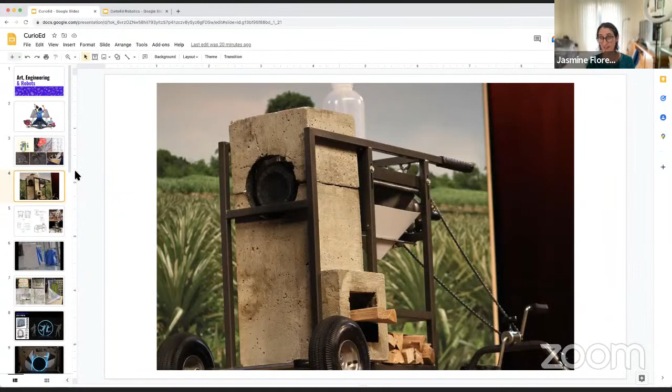And so I fell in love with product design. The reason I fell in love with it is it was sort of this combination of my love of making stuff, of solving problems, of thinking about how we're going to make this thing that can dry up milk just by using our creativity, using some math, some science. A lot of it is just about building things and trying things and seeing what works and seeing what doesn't. To get all the way to this final version, we went through a lot of other versions. That's just a couple of pictures of some of the other ones.

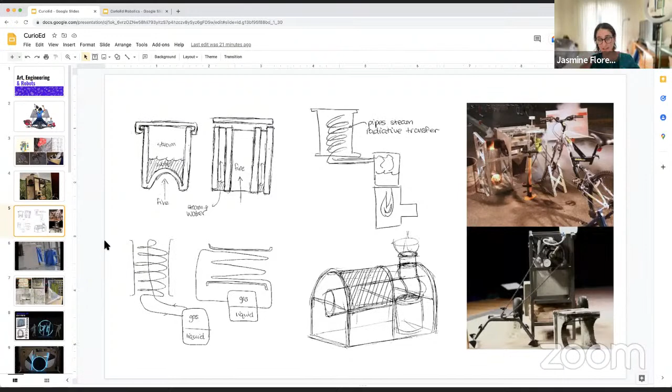So I mentioned I also like to combine art with things. And so as I kept taking more product design classes in school, I found ways to combine the art as well.

So this is another one where, again, now you really see the art and the engineering come together. This was basically for a science fiction project where we just had to make something that was science fiction themed, and my team wanted to make a really cool door. So we illustrated ideas ahead of time. In some ways it looks like an art project - it's got all these cool lights, this really cool visual - but if I show you the back, that's all engineering there.

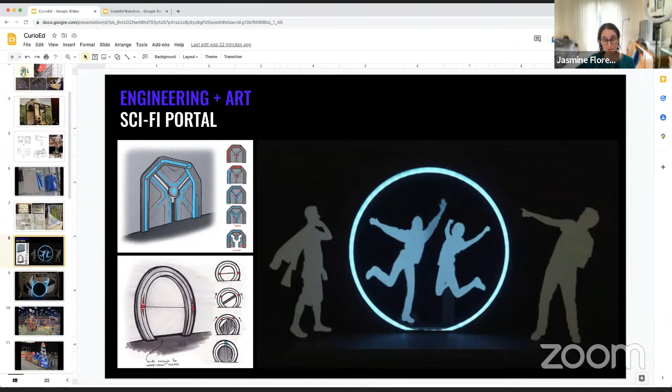We had to think about how is it actually going to move, we had to think about the electronics. It uses air power actually to move.

So after I graduated, I really wanted to keep doing things that combined art and engineering and product design. And so I worked at a place called First Robotics, and they're a nonprofit that runs robotics competitions to get kids interested in engineering and science. I think they actually have a bunch of teams in India if you guys are interested in looking into it.

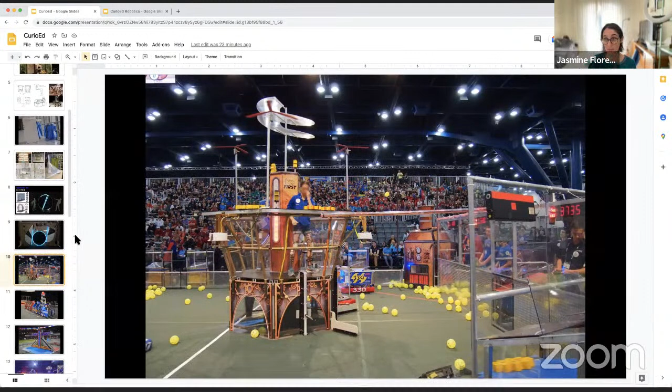So I was working at the high school level. The students actually build the robots. My job as an engineer and an artist there was to help design the games that the robots are playing.

We have these really big fields, and as an engineer, I had to think about how this is going to be strong enough that when a robot runs into it, it's not going to break. How is it going to automatically score all these little balls that come through? We need a way to automatically score them. And that's starting to actually get into robotics at that point, because when a machine is doing things automatically, that's robotics.

In addition, First Robotics wanted all the games to have a theme so they're more fun and tell a story. I got really lucky and got to do the art for all of them, which was super lucky because a lot of times if you get an engineering job, you're mostly just doing engineering. In my case, I got to think about how we're going to build this, how it's going to move, all the science and engineering, but I also got to think about how it's going to look.

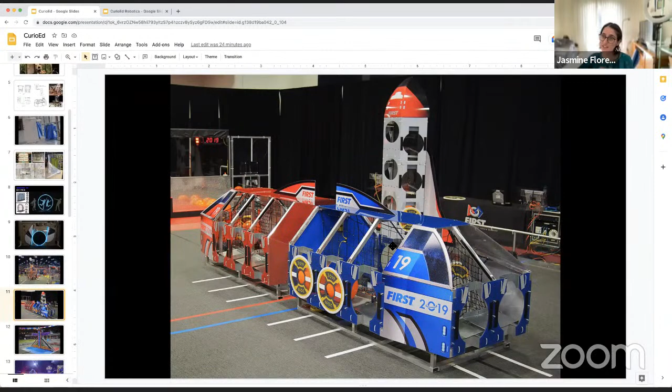So these were the games that I worked on. This one's Star Wars themed for anyone excited about Star Wars. I did not build R2-D2, unfortunately.

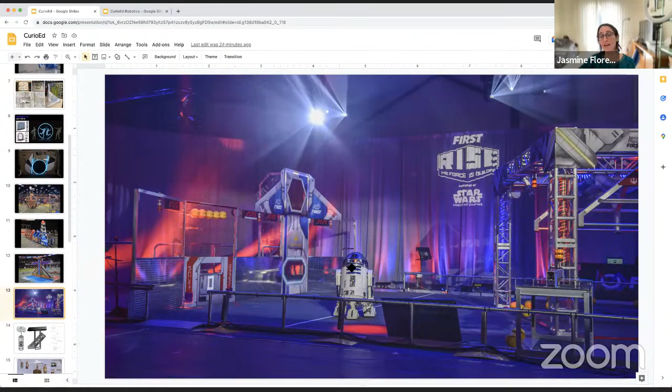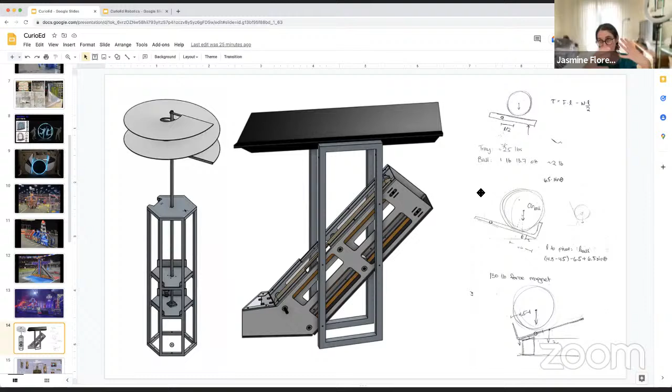The engineering side was a lot of thinking about how is this going to work, where are the motors going to go, where are the sensors going to go. A lot of it is designed on the computer, and then you go and build it on the machines. There's a lot of math just thinking about the physics of it - if you have a ball that weighs this much, what does the geometry need to be like, what material do I need to make it out of?

At the same time, there's also a lot of art. So, okay, now we can make it work, but how do we actually make it look like what we want it to represent?

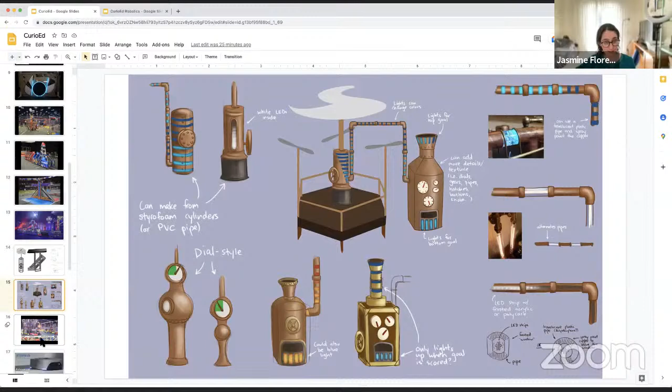So this is actually a video from one of the FIRST Robotics games. I won't play through the whole thing, just the beginning, just to give you a sense of what it actually looks like in action.

Oh no, it's just starting their trade now. Five more as the Blue Alliance unloads once again on the high efficiency boiler.

Blue Alliance - so these robots are actually all built by high school students. They work together as teams, and in six weeks they build these robots that can do all these things like shoot balls, move around, and pick up objects. They're really cool robots, in my opinion.

So like I said, I always love combining engineering and art, but I started moving more and more into robotics, and started moving more into engineering education as well.

I moved around a lot because this was when I was in the US, and then we moved to Ireland. When I was in Ireland, I worked for a more traditional robotics company. So this one you can see is not quite as artistic, but it's very functional.

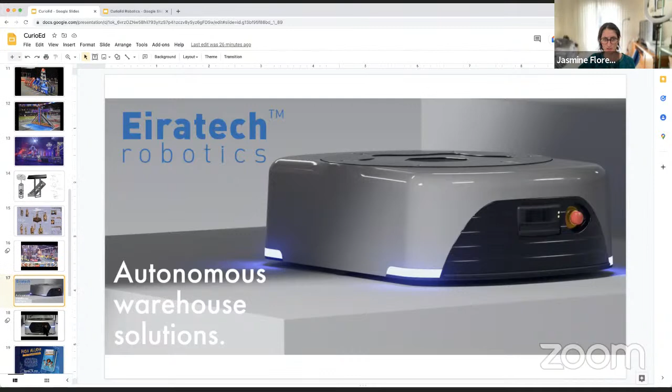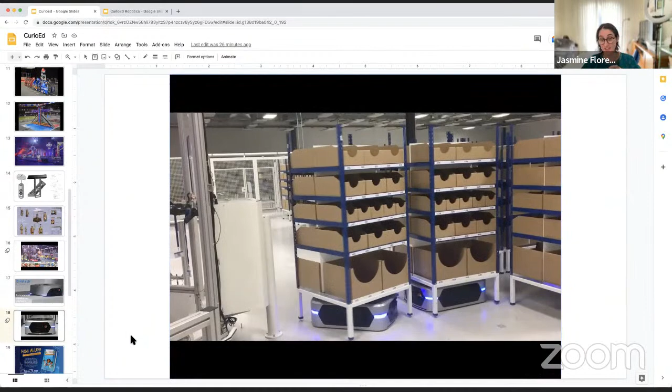So this one is designed to - let's see if that's loading. And I should add also, all of these projects I'm doing, they're all done in a team. It's really hard for one engineer to design all of these things, so we work together as teams.

These ones pick up these storage racks in factories and move them around. That way the worker doesn't have to walk down the hallway every single time and find something - the robot just brings it to them. So that was all really fun.

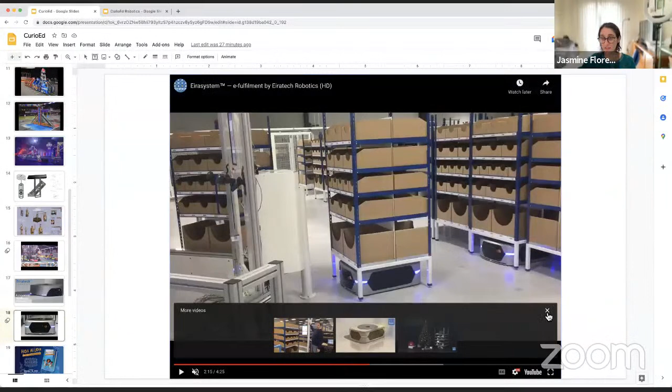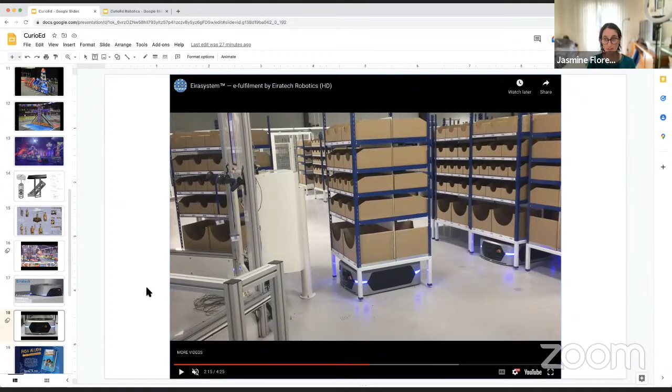And so that's what I did in Ireland. And then we moved again. At that point, I realized that I didn't want to work for a company again, just because I kept moving, so it would be easier if I started working for myself. And that gave me the chance to come back to what I really love, which is combining art and engineering and education. There's a couple things I was working on as side projects.

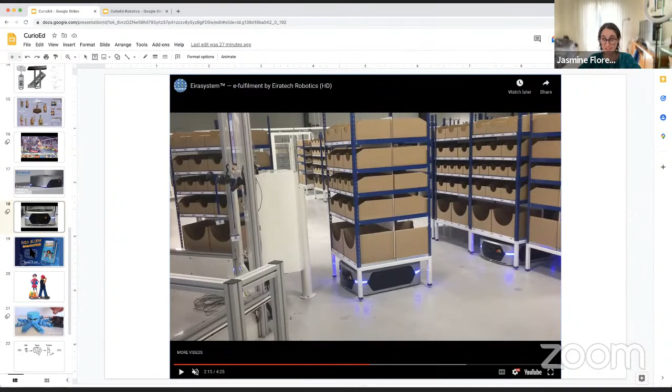So I mentioned combining art and engineering.

So I wrote a book that combines engineering with storytelling as well. And now I'm working on a comic book that also combines engineering and art and storytelling. And all of this is sort of how I got into paper robots as well.

When lockdown happened, I didn't have access, like all these other robots you saw, they were made out of metal, made out of plastic. Even the stuff that wasn't robotics requires machinery to make. But in lockdown, I didn't have any of that. I had a little bit of electronics at home, very small things, and I had a lot of paper. So I said, okay, what can I do that combines robotics with the materials I have?

I also turned my artist brain on and started getting interested in how you can use paper robots, especially because I really care about education. That's something anybody can make. You can, if you can get the electronics, which you might need help from your school or your parents, but that's something anybody can make at school, at home, without needing a lot of special machinery.

So I will actually have a video, but also show you the one that I put in. So this is one of them. This one's like a little dragon. And again, they're all made out of paper. They have basically really simple motors. And this one, when you pet it, you can see its tail wags.

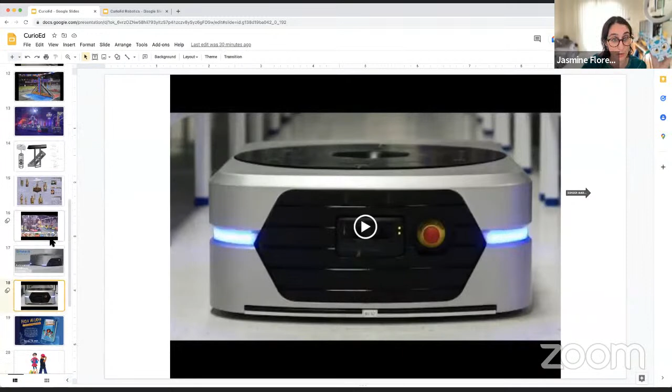So let me actually switch now to a different slide, and we're going to talk a little bit more about robots and what is a sensor and what is a motor, and what makes this a robot? Because this robot here looks very, very different than this robot, which also looks very different than the robots for FIRST.

But I will play first a video of all the paper robots. Unfortunately, I couldn't set all of them up because there's a lot of them and I only have so many electronics. So I usually have to take the electronics out of the paper.

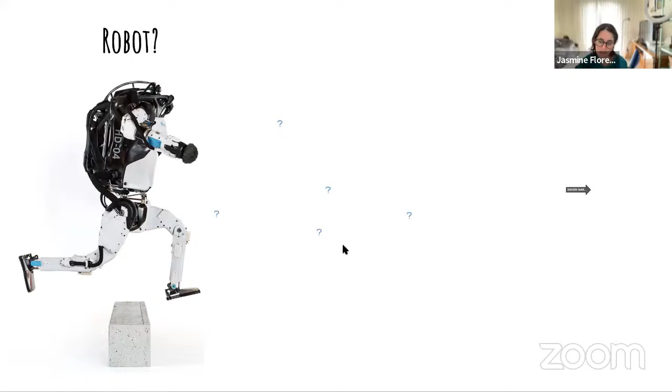So first of all, what is a robot? I don't know, do you guys think this here is a robot? You can do a thumbs up or a thumbs down. Yeah, it's generally considered a robot. But how do I go to the next slide? There we go. Would you consider this to be a robot? I'm seeing some, not actually seeing all of you guys, seeing some thumbs up, some thumbs down. So I actually wouldn't count this as a robot, and I'll explain why in a moment.

What about this washing machine? Mostly thumbs down. So that's the crazy part, is actually it can technically be a robot. So let's talk about what we actually define a robot as.

So a robot is basically a machine that works automatically. In other words, it doesn't need a human like me to give it instructions the entire time. Sometimes it only does some things automatically, some things it does everything automatically. So the very first one, that's a really, really high-tech robot. That one probably does almost everything automatically. It doesn't need somebody controlling it from a computer, telling it what to do.

The remote control car, on the other hand, if you're not controlling it with the remote, it doesn't do anything. So it's not doing anything automatically, it's just doing what the person says. The washing machine, that's where it kind of is. You wouldn't think of it as a robot. And a very simple washing machine where you have to push all the buttons and say, I want it to run for this long and I want it to put this much detergent.

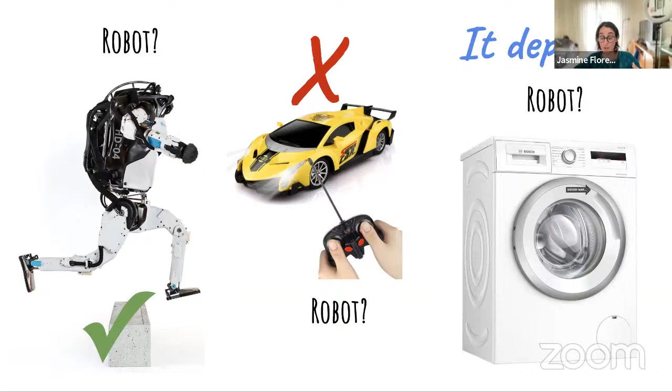That's not really doing anything automatically, right? Because you're giving it all these instructions. But actually, they now make washing machines that automatically decide how long they should run, how much detergent they put in, based on the weight of the clothes. So they're kind of starting to think for themselves, doing things automatically because we don't have to give them all the instructions. And so at its basis, that's basically what a robot is, something that can do things automatically without all the instructions. So next question is, how are they doing things automatically?

Before we look at this, let me stop sharing for a second to show my robot again. So if we look at this guy again, it's very simple. It doesn't do very much, but what it does do is it does actually make some decisions automatically.

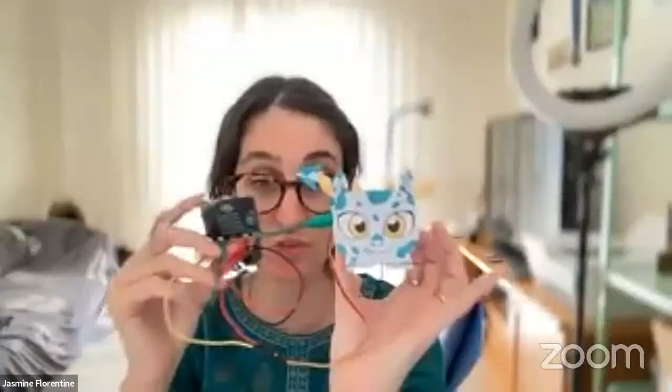I mentioned this thing actually has some sensors built in. So in this case, when I'm petting it - well, let me back up. If I don't do anything, it's sitting there waiting for instructions. It's not doing anything. What it's actually waiting for is, is somebody petting me? And if the answer is no, it's going to say, okay, I'm not going to do anything then. And if somebody does pet me, okay, I'm going to do something now. So it's making a very simple decision.

What it's doing is it's making a decision based on an input. An input is information it gets from the world outside. In this case, there's just a piece of aluminum foil there that it's actually looking for. Then it's making a decision about what to do, and that part is based on this, which is the computer, acting like its brain. So we have an input, which is how it gets information from outside, and then the output, which is what it does to interact with the world around it.

In this case, it's using a motor, which you can't really see because it's inside of here, but you can see that little thing sticking out as part of a motor. Yeah, I glued that shut. And that would be the output.

So if we look back at the slideshow - oh my, I have so many windows open that I can't figure out where it goes. Wrong one. Why does it keep showing the wrong video? I'm sorry, one second. There we go. This is what happens when you have too many windows open. Okay, so going back to this.

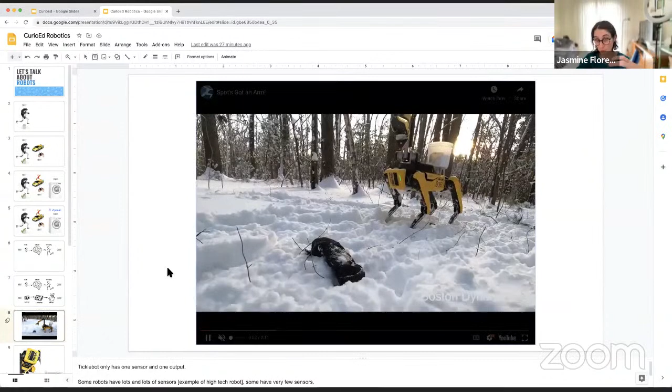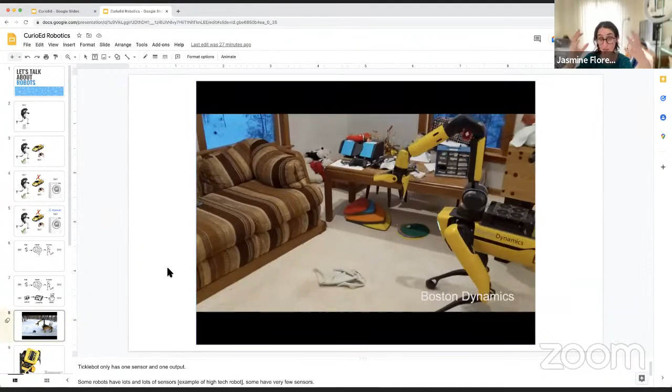So this one, once it plays, has a lot of sensors. It's to be able to do all those movements and stuff. It needs to have a lot of sensors to get as much input from the world as it can. It's got a big, complicated computer because it's making some really difficult decisions.

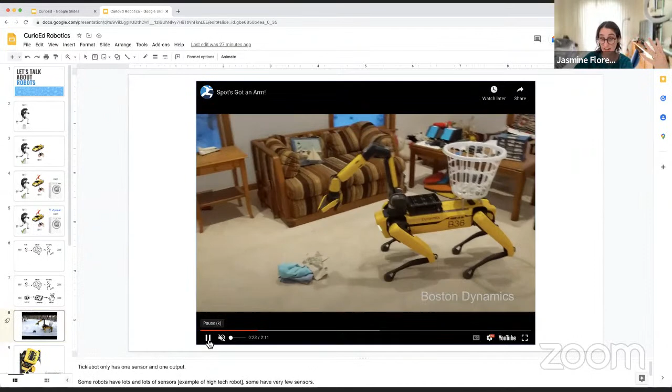And it's got a lot of different motors, so it can move in a lot of different ways. So that's an example of a much more high-tech robot, and actually that one's by Boston Dynamics. You can even see just on this part, all of those things are all cameras. I'm not sure what that in the middle is, but that's probably also a sensor, or that might be to vent out air.

I'm not actually sure, but the point is, instead of like my little dragon, which can sense one thing and do one thing, this can do a whole bunch of things. And this is designed by a team of engineers, and they spend years working on this. So this is not quite something you can do at home, unless you put in a lot of time, and I suppose if you do a bunch of research first.

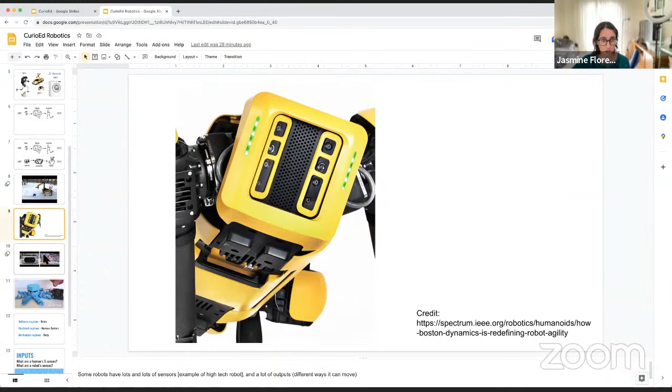So the robots I showed you earlier, they're sort of in between. These robots do have more than one sensor, unlike the paper robots. This one needs to be able to sense if there's someone in front of it, so it doesn't crash into them. It needs to sense if it's under something as well, so it knows when to lift something up. In terms of outputs, it can move around, it can lift things, and it even has lights, which is a type of output.

To go all the way back to engineers, at the very beginning I said I'm a mechanical engineer. So I should say that there's actually a lot of different kinds of engineers who work on robots. Software engineers are the programmers, and they write code, basically writing the brains of the robot. They're working on the computer part. Electrical engineers are working on the electronics, so that's sort of like our nervous system, like all the wires and actually designing the sensors that they're using.

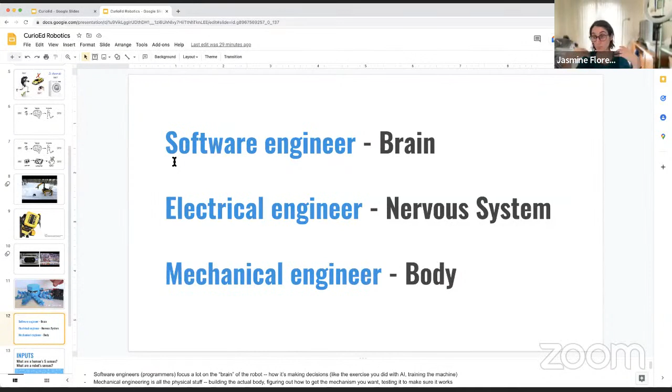And the mechanical engineers think about the body. How is it actually going to move? How are you going to take a motor, which just goes round and round, and make that into an arm that moves around? Also just thinking about how you're going to make it so it doesn't break, and so it's strong enough to do everything it needs to do.

I guess let's make this a little more interactive now. We'll get to questions in a moment, but I kind of want to talk a little bit more about inputs and outputs, because for robotics, they're so important.

So first of all, what are a human's five senses? I'm seeing answers in the chat - that's great. Sight, smell, touch, hearing, and we're missing one. Yeah, taste, exactly. So skin, that's a good one. That's actually part of touch - our skin is like the main way that we feel things.

So what are some of the senses of a robot? Yeah, so some robots can also see, and to do that they can use different kinds of sensors. They can use a sensor that has a camera on it, or an ultrasonic sensor, which works kind of like echolocation - it'll send out a sound and wait for the echo to come back. But that basically works as a sense of sight, because it can tell if there's something in front of it.

Oh, I'm seeing a lot of great answers here. Light sensors, yep, that's used to detect light, and the microbit I have actually has one of those built in. Sound sensors, so it's basically just a microphone, and that's how it can listen for different kinds of sounds. A very, very simple microphone might only listen to, is this loud or soft? A complicated microphone, like what you have in a lot of smartphones, can actually understand what you're saying.

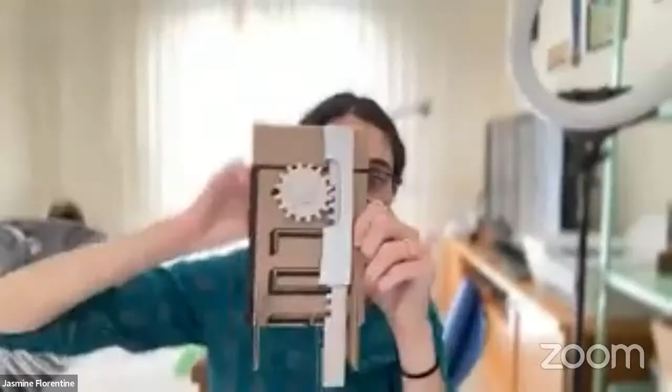I actually have an example right here. I'll stop sharing for a second. This is an example of a very simple gear, made out of cardboard and a pizza box, a rack and pinion. What it does is it takes a turning motion, just turning, and turns it into an up and down motion. So you can imagine how I can attach a motor to this, and then my output, which is spinning, becomes up and down. Gears are a way that you can use different mechanisms to kind of change the outputs.

So let's say I am making a robot that needs to move around my house, and it needs to work even in the dark. It needs to not run into people or objects because I don't want it to ruin my house or hurt anybody. And it also needs to go up the stairs. So what are some of the inputs that we would want it to have? Inputs like, what kind of sensors?

Yeah, sight. So we would want it to be able to see if there's people. Sight, I'm seeing sight and night vision. I'm seeing hearing, yeah, so that way it can actually hear if there's people around as well. Touch, that's a really important one because it can actually tell if it's touching an object. Smell, I don't know, we could have a robot that goes and smells things. I don't know if we would need one for this kind of robot, but it would be really cool.